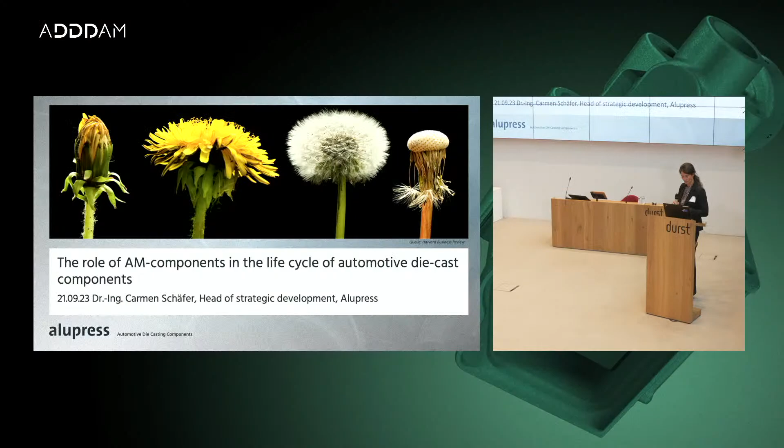Okay, thank you very much for the introduction, Matthias, and thank you for the possibility to present Alupress today. My name is Carmen Schäfer, I'm head of strategic development of the Alupress Group. Alupress is, as Harald said, an automotive die-cast manufacturer for the automotive industry. And I have the possibility today to show you how AM components can help us in the life cycle of automotive die-cast components. So short motivation, afterwards I show the automotive die-cast component cycle, then 2 examples, prototyping and tooling, and closing with a summary.

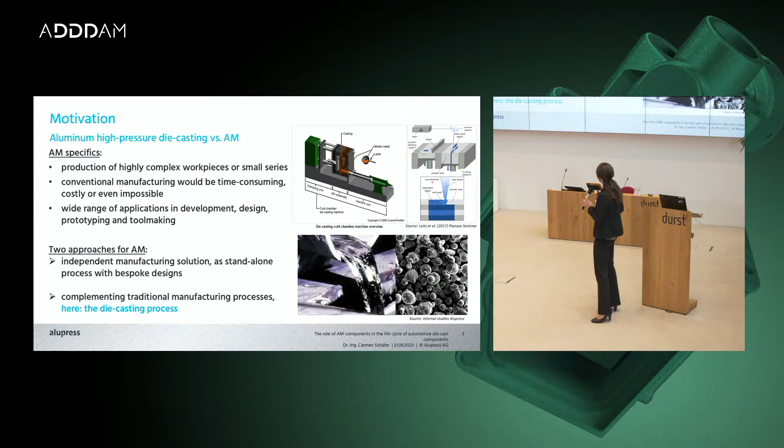On the right-hand side, you can see the huge difference. In case of die casting, we start from the melt. We have the cold chamber die casting process, and on the right-hand side, the prototyping, which starts with the same material in a different condition, from particles with selective laser melting. So we use the AM specifics. We can use high complex workpieces, design geometries, produce small series, and we can support also tooling. So in general, there are 2 approaches for AM. There is the independent standalone version of additive manufacturing with a dedicated design, or we use it as a complementing technology to traditional manufacturing processes, as in this case, for die casting.

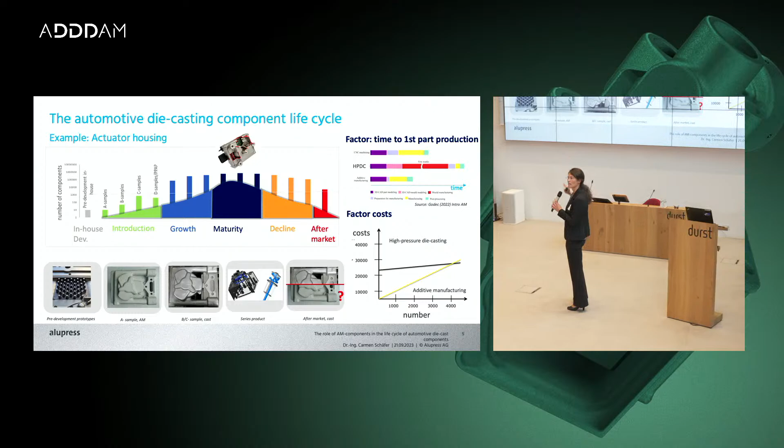On the top you see an actuator housing. This is the full component, and you see the die casting or additive manufactured part on the bottom. As soon as we enter this blue stage, growth and maturity of the component with hundreds of thousands of components, AM can support us, as Harald said, with tooling, to improve the tooling. And afterwards, there is a decline after a few years, and we have the topic of aftermarket.

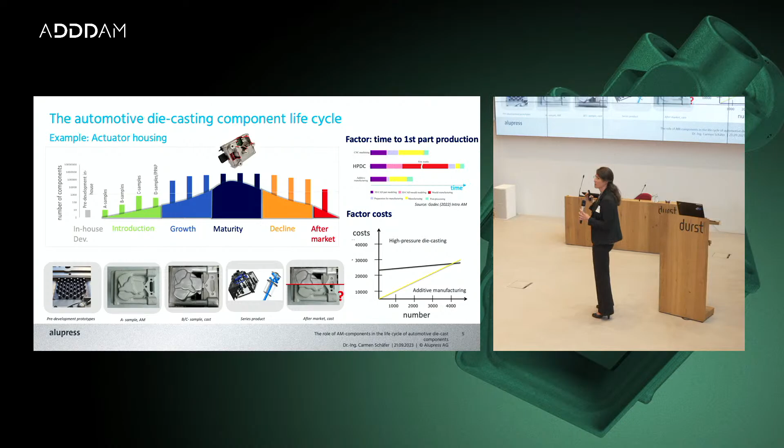And that is another possibility. You see the die casting and additive manufactured components with higher numbers, usually 500 to 5,000 pieces per year.

There are two factors that are important. First is the time to the first prototype. And you see there is high pressure die casting - this reddish area is these 12 weeks, a long time. We have the possibility to use CNC machining or even better additive manufacturing, so this is the shortest time we can get.

And since this tool that I mentioned at the beginning costs quite a lot of money, we have a very late break-even point in numbers. That means also at the early stage, we can use additive manufacturing as a cost-efficient solution for our parts.

I cannot build a tool, there is no budget for this at this stage, and I need it fast and lots of varieties. And then I can use additive manufacturing, and I can get my results.

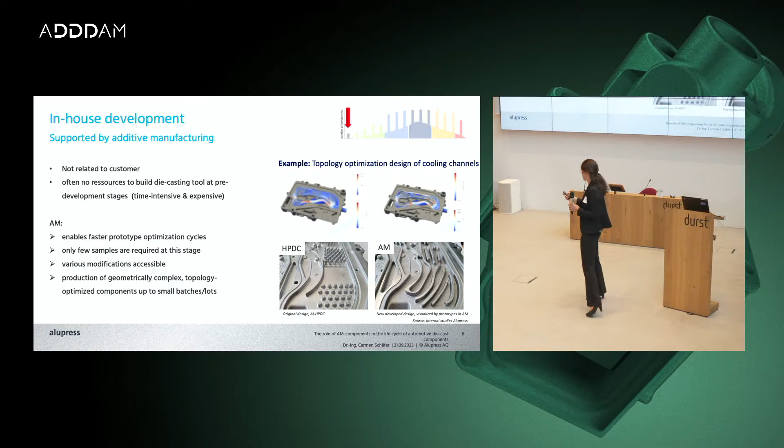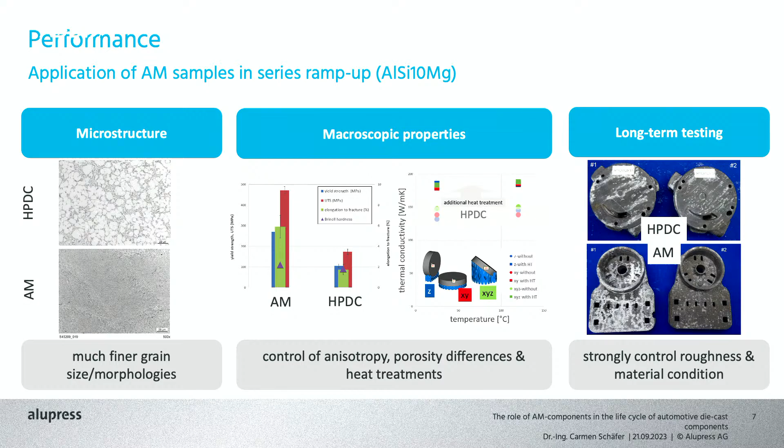Before I come to the next part, for series production, there is one issue to discuss about AM and die casting. You see it on the left side, it's the microstructure. High pressure die casting has a fast solidification rate, but AM is even a factor 100 faster - very fine microstructures, and they result in excellent properties.

You have the high pressure die cast, and you have on the left hand side the AM properties. They are anisotropic, you need to consider that. It's not a showstopper, but you need to keep it in mind.

And you can see it here on the right hand side, for example, for the thermal conductivity. Also this, if you need to preheat your building stage, or you want to change the thermal conductivity on purpose, you need to consider the building direction in AM. On the right-hand side, we have also the issue of roughness or material condition if you go in a long-term testing. This works fine, it agrees very well, and you need to consider this.

So if I come now to the main prototyping process, we want to go in die casting to the PPAP, to the production part approval process. And we have various stages of samples - A samples, B samples, C samples, D samples.

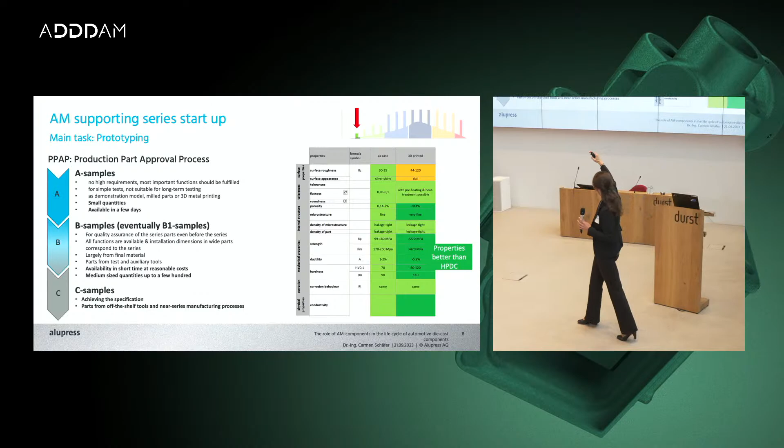And you see the blue coloring shows us that we can use A samples already in die casting, in additive manufacturing, and some of the B samples - small numbers, short time. And on the right-hand side, you see already the agreement as cast 3D printed. And you see mostly it looks pretty good. Some things you need to consider, and in some cases it looks even better. This has to be discussed with our customers.

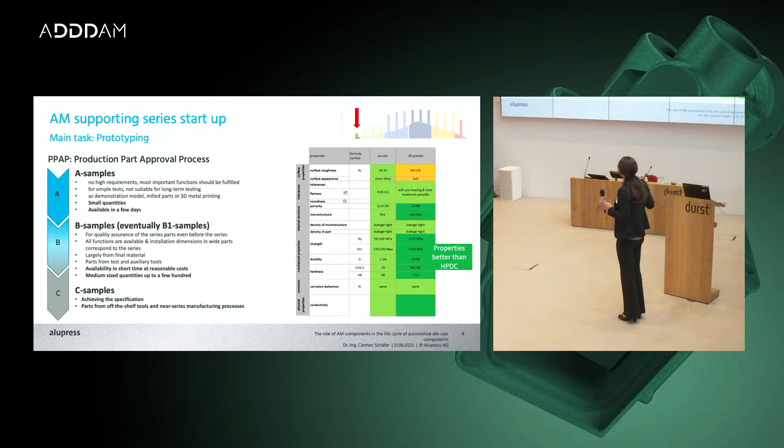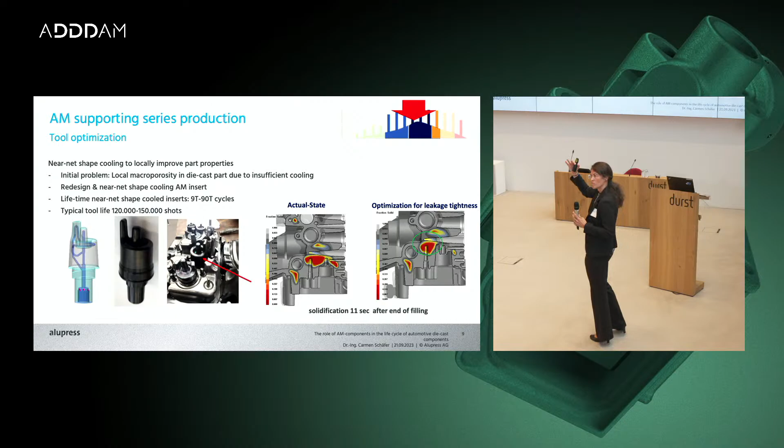When we go now to the maturity of the component, we have AM supporting our series production. The tool usually has lots of load in terms of thermal cycles - very high temperature, high load, so you can improve the tool locally by cooling, but also you can improve the tool for the properties. And this is a truck housing, an air dryer.

You see the seats for pneumatic ventiles on the bottom, where this red arrow points. And here in the simulation, we have this reddish area. That means I have a macroscopic shrinkage later - I have a hole in the material, which I don't want to have.

And you see here, where this greenish area is, we optimized actually this die with an insert with near net shape cooling, and we could reduce this area, improve the material. So this is also how we use AM since 2018, since several years in production.

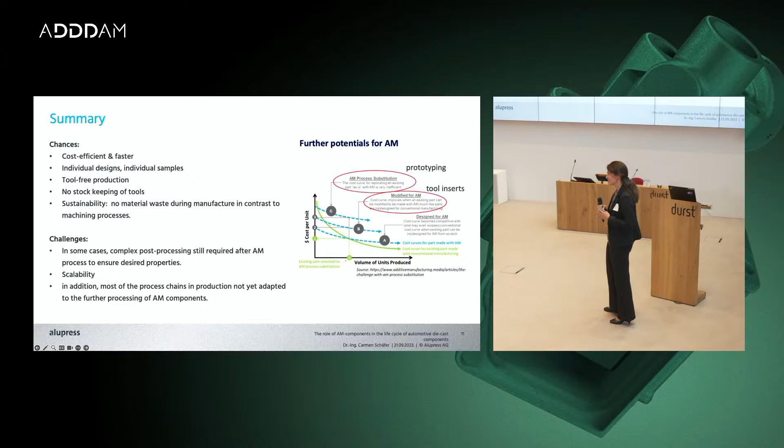So closing with this, the challenges are still, of course, in the scalability, and I think there will be several talks today going more into depth with this topic. Thank you very much, and I'm happy to answer your question in the Q&A section.

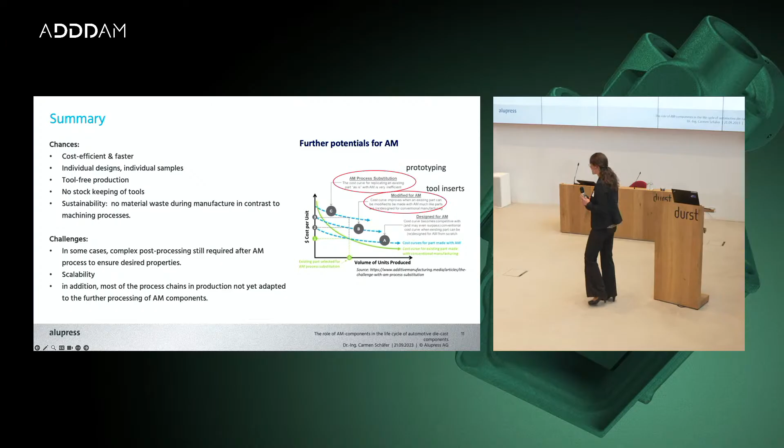Yeah, Carmen, thanks for the very nice presentation.

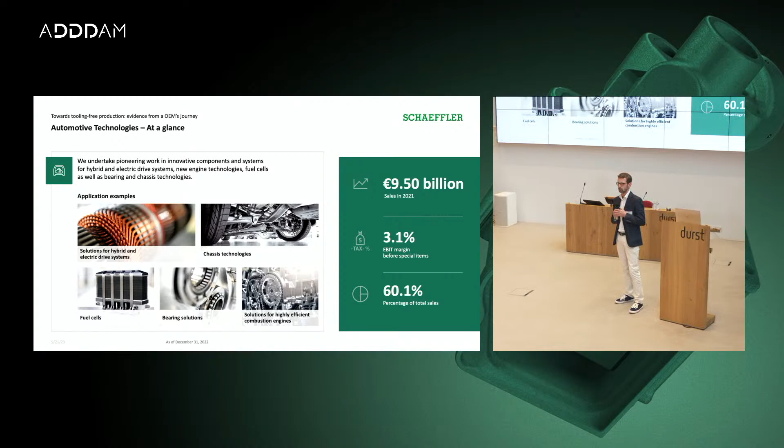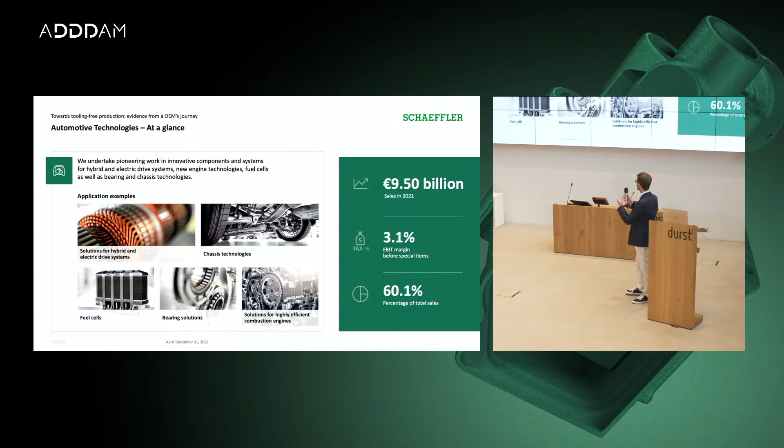What do we do within the automotive technologies division? Our goal is to provide our customers with groundbreaking solutions for highly efficient combustion engines, but we also offer e-motors, e-axles, and solutions that include the use of fuel cells. Within this complex organization, I work in the purchasing department, where we are responsible for managing nearly 1,900 suppliers, which deliver us 26,000 different parts, for a total purchasing volume of 4.5 billion euros annually. In other words, the perfect playground to explore the use of additive manufacturing.

Additive for us at Schaeffler is not something new. We established an internal additive manufacturing department in 2015. The department still exists, and my colleague Carsten Merklein is the head of the internal additive manufacturing department. As of today, nearly every Schaeffler plant uses additive manufacturing. We have internal printers to produce prototypes, tools, fixtures, or material that in general is used within serial production.

But to be honest with you, as of today, we do not actively purchase any part from our suppliers which is produced with additive manufacturing. And some months ago, we decided to start questioning ourselves, and we asked how we can include additive manufacturing in a sensible way within the product life cycle of our products.

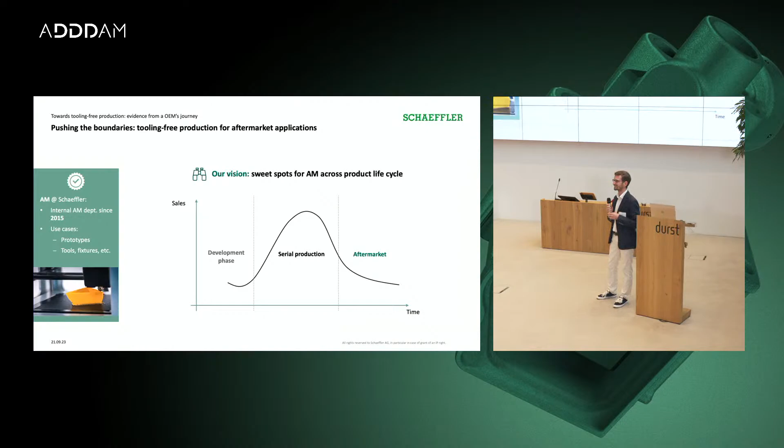Carmen already hinted at this before. For sure, we see potential in the development phase of our products. Additive manufacturing for quick prototyping is, however, no big news, as Matthias will say - it's an established use case. Where we see more potential is in the aftermarket phase, on the right side of the tail of our product life cycle curve. Why aftermarket? Because there, additive manufacturing could pave the way for what we call tooling-free manufacturing.

What are the characteristics that, in our view, make the aftermarket phase especially appealing for additive manufacturing? Two main characteristics. First, the low volumes - as automotive companies, after the serial production run, we need to still produce our products for the so-called aftermarket for a certain number of years.

In this instance, typically volumes are really low. It's really infrequent to see that we produce aftermarket parts with a volume which exceeds 1,000 pieces per year. In most cases, we need to produce just 100, 200 pieces per year.

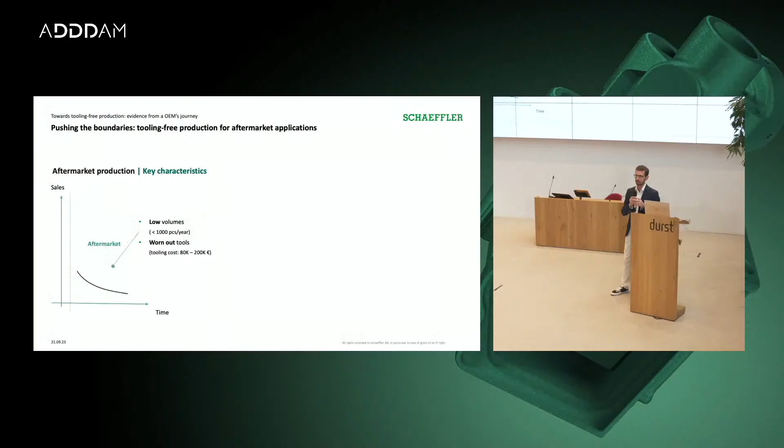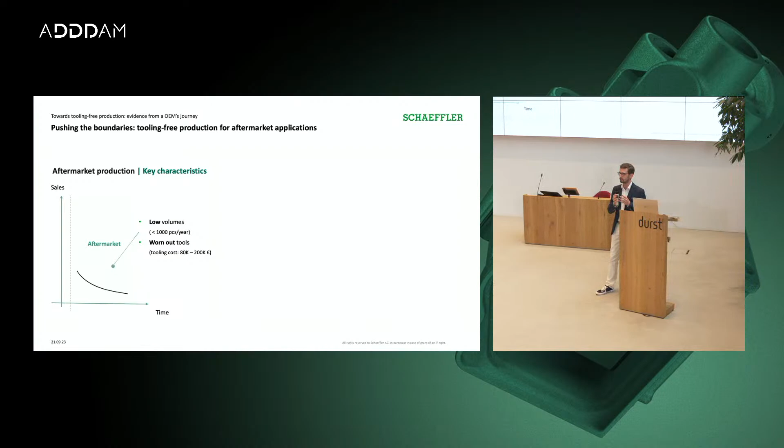Second point that makes aftermarket especially appealing for additive manufacturing concerns toolings in general, which are worn out after the serial production run. Replacing a tool is an expensive proposition, and sometimes it's really difficult for us to justify this sort of investment when we are looking at such low volumes. A technology like additive could really be a game changer, as it could enable tooling-free manufacturing.

To bring our vision closer to reality, we partnered up some months ago with ADDDAM. We decided to focus on one of our commodities, which are aluminum die-casted components, and we followed a two-step approach together with Matthias and his team.

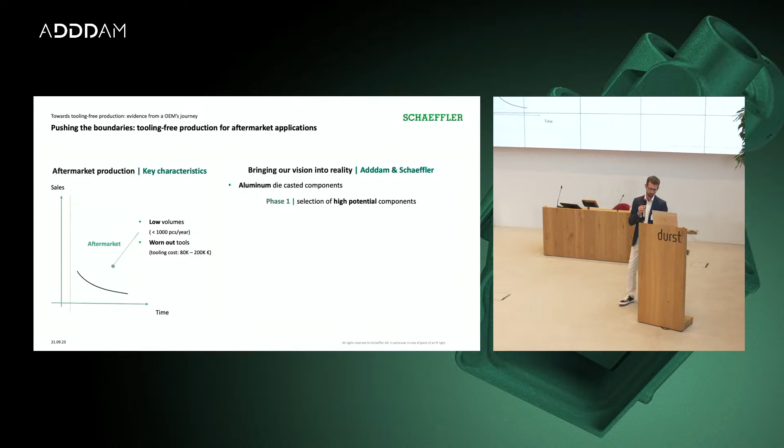In the first phase, we decided that the best option was to start narrowing the field and highlight and select components that have a high potential for production with additive manufacturing. We started with a list of 436 components, and here the ADDDAM team acted as our funnel. We narrowed down the field and came up with a list of just 8 part numbers that, in our view, are the most promising ones.

Why promising? Because volumes are typically very low, below 150 pieces per year, but we have also some part numbers for which the demand is just in the range of 40, 30, 50 pieces per year. So really not appealing for traditional die-casting manufacturing.

We also had a look at the geometries. Typically, geometries here are not especially complex, and they are also well finishable parts.

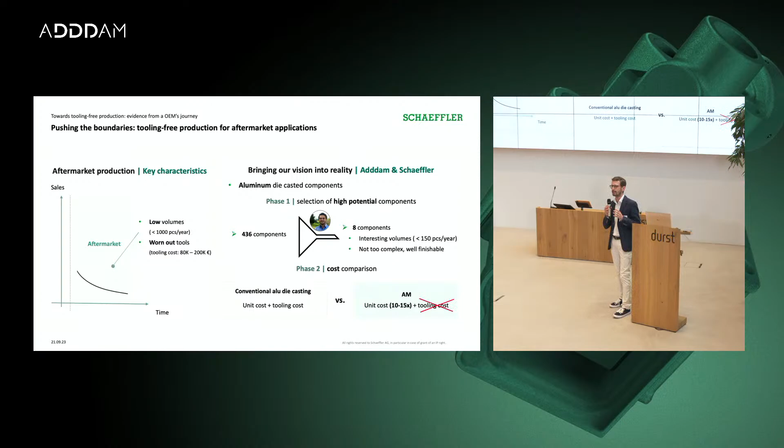As a second step, we are also looking at cost, but we are doing so looking at the so-called total cost. For traditional aluminum die-casting manufacturing, the total cost is the sum of the unit production cost plus the tooling cost. In the case of additive manufacturing, the tooling cost is not really there. We have to look at the unit cost, which, let's be honest, is way higher than the unit production cost for typical traditional aluminum die-casting.

One of the outcomes of our project is that the unit cost for additive is 10 to 15 times higher, but we do not have the tooling cost. So in the end, the cost comparison starts to make sense, and the numbers are really close to each other, with an added benefit for additive: the absence of stock. Because then you can produce the parts when you need them, and that's extremely appealing for us as a manufacturer.

So the cost comparison is ongoing. I'm expecting that in the next weeks we can complete it, and I'm positive that in the next months we at Schaeffler are going to have the first parts produced with additive manufacturing out of this project.

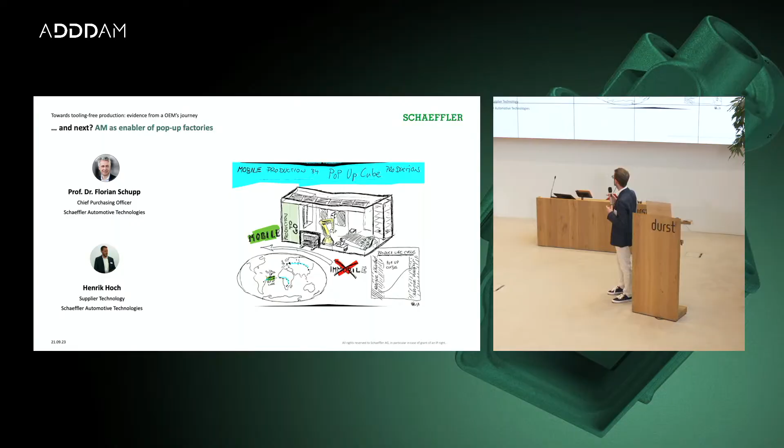But then what's next? Let me present this vision that we developed together with Florian Schupp, who is the CPO at Schaeffler, and Henrik Hoch. The combined use of flexible production technologies such as 3D printers, but also flexible automation, could pave the way for what we have named pop-up cubes, pop-up factories.

Our suppliers could package their production equipment within cubes, within containers, and then these containers could travel along the globe to be extremely close to our production facilities, with two main benefits: first, enhanced interaction between supplier and customer, and second, enhanced resilience of the supply chain. We all know how that is becoming more and more in focus given the latest developments.

That's our long-term vision, and I'm positive that thanks to ADDDAM and projects like the one we are conducting with ADDDAM, we will reach it in the next years.

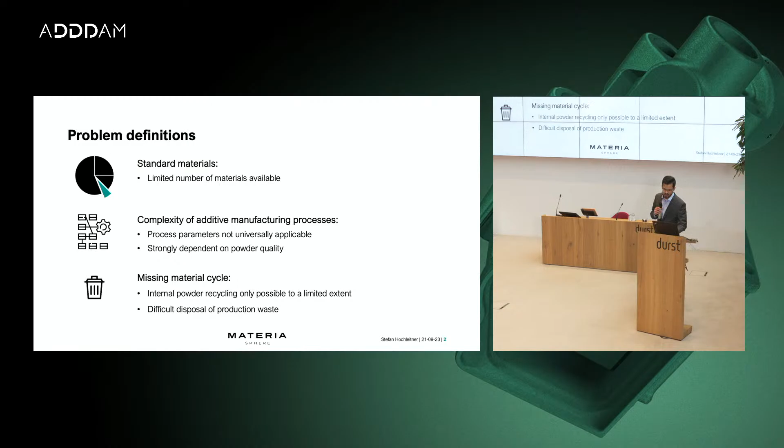Last but not least, the third topic for us was the missing material cycle. We found no good solution to dispose of production waste, and internal powder recycling is only possible to a limited extent right now. So we are working with three solutions right now.

First of all, we specialize in material engineering. We have the equipment and knowledge to produce individual materials to your specification and do iterative development using small powder quantities that we can produce in-house.

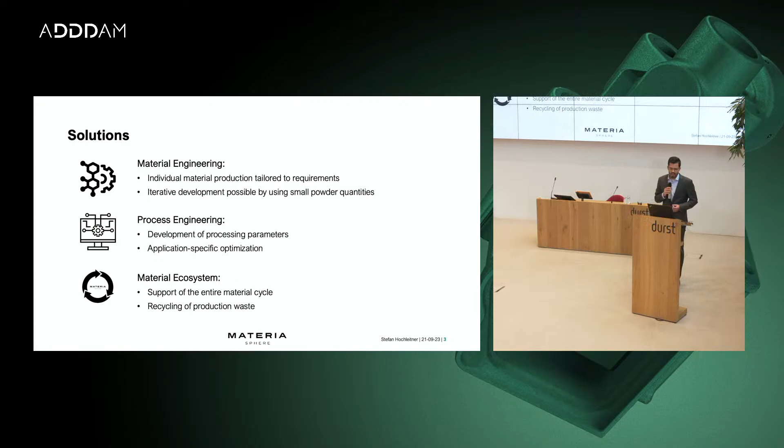Second, as I mentioned before, the process is also a big part of the part quality later on. So we also develop the processing parameters for our developed materials and can do application-specific optimization.

And last but not least, we're working right now on a material ecosystem where it's possible to support the entire material cycle for additive manufacturing and recycle as much waste as possible in the future.

So what's the first and biggest enabler for our work? It's the powder production itself. We focused on getting machines that can help us with individualized materials, and therefore we use a small batch production machine which uses an inert atomizing process.

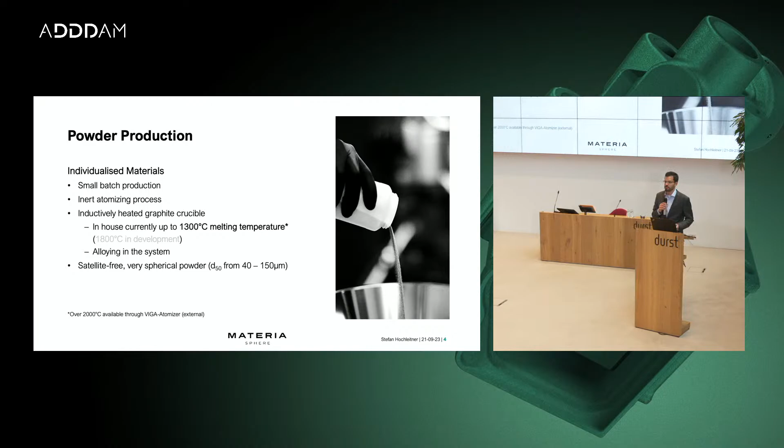We use an inductively heated graphite crucible, so it's possible for us to alloy directly in the system. The outcome of the machine is very spherical, satellite-free powder with a D50 particle size distribution from, let's say, 40 to 150 micrometers, depending on the customer's needs.

With the powder production sorted, we focused on material engineering. The materials for additive manufacturing are special in a way that you can tune them to your demands. You can tailor material properties to your needs. You have influence on strength, hardness, elasticity, and also thermal and electrical conductivity.

It's also possible to fine-tune process-specific powder properties, like the particle size distribution. You get some influence there with production. And it's also possible to account for the influence of volatile components during the process.

So if you use a zinc-rich alloy during your laser beam production phase, it's possible that some parts of zinc evaporate and your alloy is not in spec anymore after the process. We can account for this beforehand, and then after the process you get your alloy in spec.

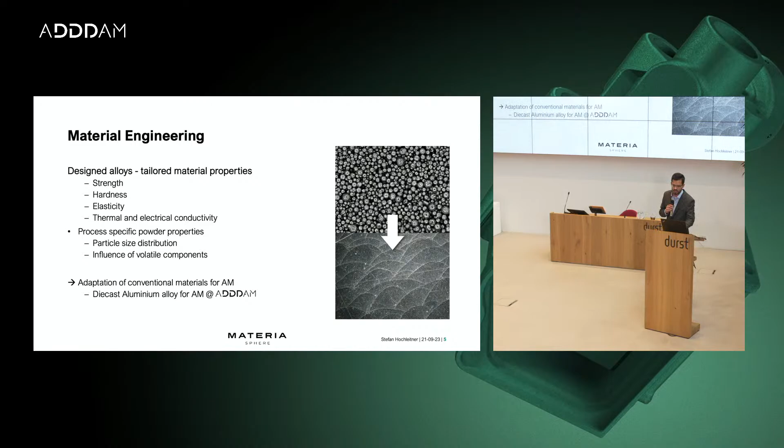With these methods, we were able to adapt a conventional material for AM here at ADDDAM. They are using, or will use, a die-cast aluminum for AM, and it was possible for us to enable them to do so.

Our material portfolio right now reaches from aluminum alloys, as I told before, to copper alloys as well, and in the future we want to get others into the company. Right now we have to rely on partners for these alloys, but it's also possible.

As I mentioned before, the process is as essential as the material itself, because you have a very strong influence on part quality with the processing parameters. Depending on laser speed, laser power, and hatch spacing, for example, you can influence the porosity, surface roughness, mechanical properties, and also the process productivity itself.

So it's possible in the future to build bespoke part features and build strategies depending on how your part should perform. You could print the bulk volume of the part with a completely different parameter focused on productiveness, and you can print high-strength points in the material with, let's say, a strength parameter, which is slower but enables greater strain resistance of the parts.

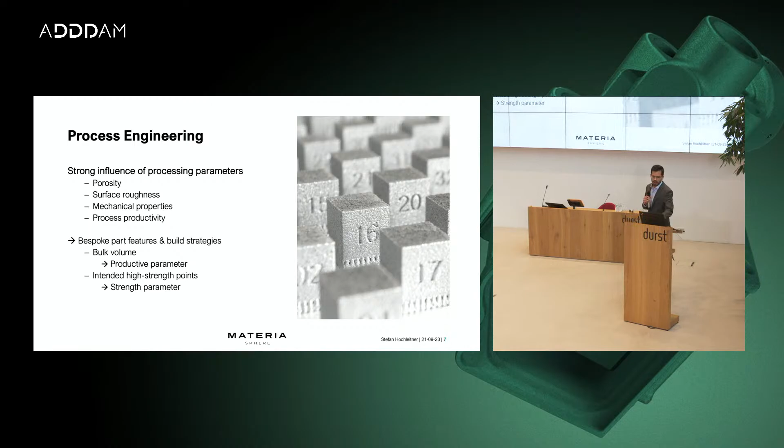Process, I mean printed - on one hand you get the part, on the other hand you get the production waste, and there is no good way to dispose of it. We want to establish a system where you can recycle the production waste and powder scrap. We get them back from you via a deposit system, analyze and treat it.

The whole cycle will use a mass balancing approach to keep track of the powder, certified via blockchain. Of course, there are challenges right now for such a system. First of all, it's the lack of standardization for materials in additive manufacturing, and carbon accounting is difficult right now because data is missing. To get this data, collaboration of all stakeholders along the chain is needed in the future.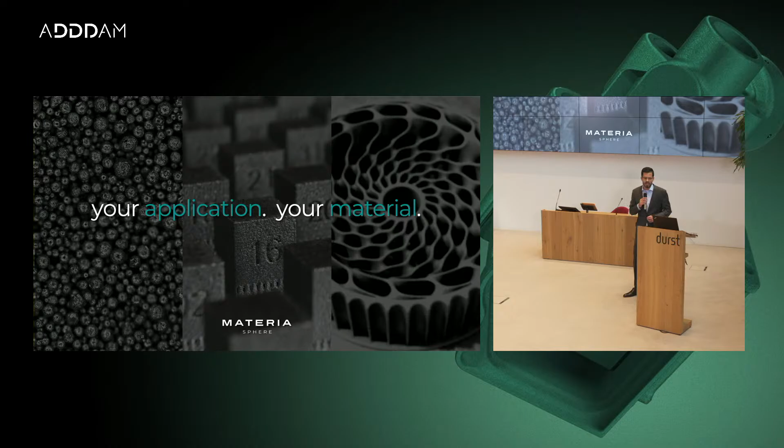But we see big benefits from there. First of all, naturally regulatory compliance is a big topic. But the main reason why we are doing it is because we want to reduce waste. We want to have a higher resource efficiency for additive manufacturing, and overall generate a smaller CO2 footprint by using more efficient secondary materials. So to sum it up, our big goal is to widen the possibilities of additive manufacturing via a wider material field. And we want to do it for your application and your material. Thank you.

Yeah Stefan, thanks for the insightful presentation. Just to leave this slide on - if you look at the middle, the little cubes, that's actually the result of our parameter study, originating from original die casting material, which you can see down on the left. There's also the atomized powder on the left, and the cubes after design of experiment. The final product is not yet there, but it looks very promising. It's also in our exhibition next door that we will enter after the presentations, so you can touch the results firsthand.

With that said, material is an extremely important piece in the whole additive manufacturing domain, enabling our applications at different customers. And material handling is also very important, so this is the point where I want to hand over to Martina, who will talk not only about automation in additive manufacturing, but also about some innovative ways to handle material during the process. So Martina, your stage - take your time.

Thanks again, Stefan.

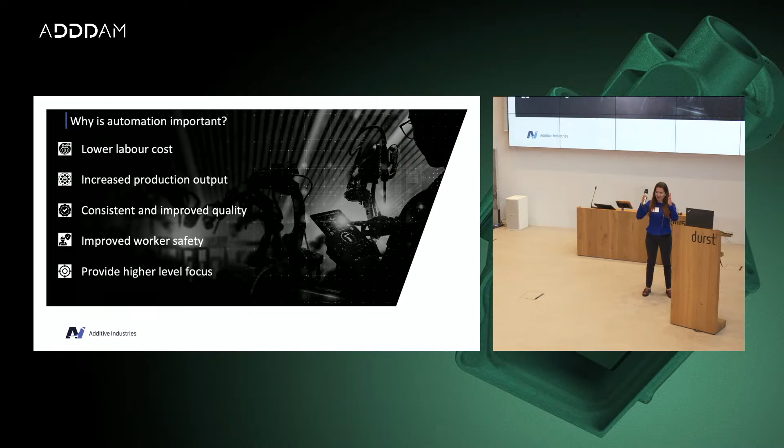By using automation, this exposure can be avoided, so that's another big benefit. And then the last one, maybe the less intuitive one, is that by reducing the time people need to work on the system and process, they'll have more free time to focus on other things, like improving other parts of the process, for example post-processing. Sometimes we focus so much on improving laser productivity that we forget the part is waiting for post-processing for days because there's a bottleneck there. So, more focus on the high-level process.

So, what are the main pain points of metal AM that have been identified today? This is very interesting. The AM Power report in 2023, this year, has reported a utilization rate of the current worldwide installed base of laser powder bed fusion systems as only 62%.

Now, there are two reasons for that. One is that there are a few companies which are very new in the market, and so the utilization rate is low because they're still finding the business case and application, which is normal in the scaling up process. But the other important point is the timing.

And with timing, I mean that anyone familiar with these technologies knows that when we start a job, we don't know when it's finished, or we know but cannot really control it. It might finish during the night, and maybe we don't have a shift during the night, the operator is not there. So if a job finishes during the night, the machine stays in standby until morning, and that time adds to a sum of times that lowers your utilization rate. Here automation will play a role.

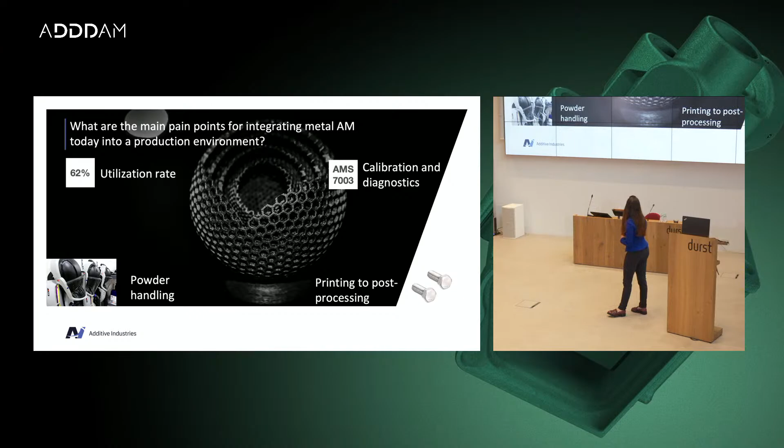Another pain point is calibration and diagnostics. This is very important for having a consistent process. We need to control the machine, the laser, the calibration. There are a couple of standard bodies like AMS or ASTM that are now finalizing and releasing more and more standards. The question is, how can we apply these standards in a consistent way? How can we be sure that this works?

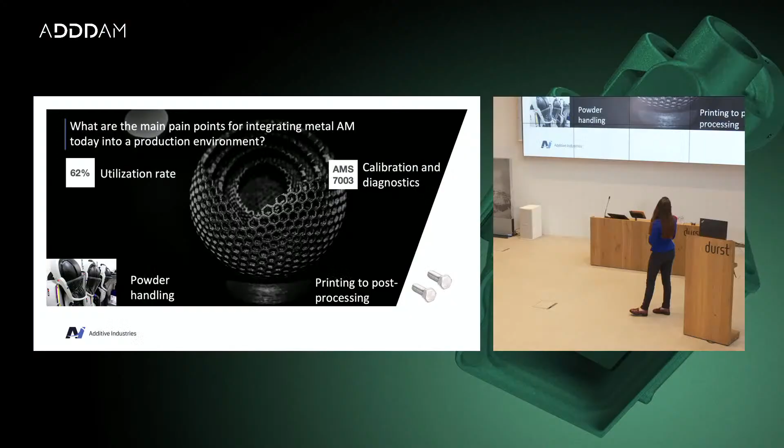And the last pain point we see is the link between the printing process and post-processing. The reason there are screws is because, if you're familiar with this process, you know it's not very easy, because you need an operator to unscrew the build plates from the machine, move it to the next step, and maybe screw it again. This is not really something that can be easily automated.

Now, in the next slide, I want to show you the possibilities that automation gives to laser powder bed fusion, and in particular, how we at Additive Industries have implemented that. So the first part is about the utilization rate, by adding robotics into the process, the automation.

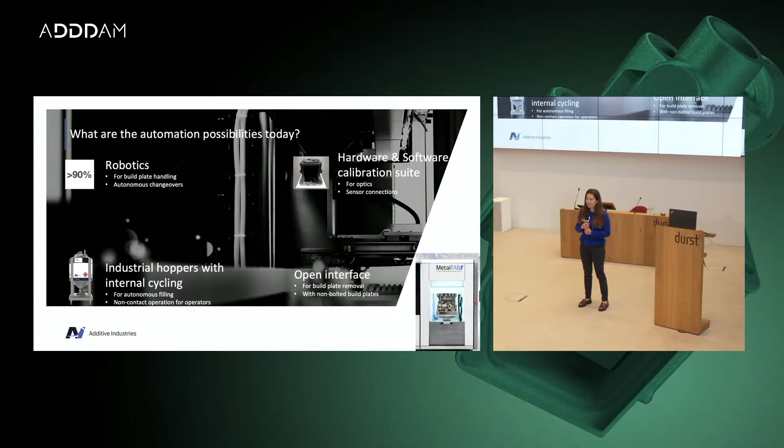For example, the build plate handling and the build plate leveling is done automatically, as well as having a robot in our machine that moves the build plates automatically from the process chamber up to the exchange chamber, and all these kinds of things. This way, we don't need to wait for the operator to be back in the office or on the production floor during the morning.

In one of our fully configured machines, we can run up to 8 jobs in series, even in different materials, without any manual operation. So you can just press play and the machine will do everything automatically.

The second point is the industrial hopper and the internal cycling, which answer the question about the powder. As I said before, the powder exposure of the operator is a big problem, and so for this, we try to avoid it.

We are avoiding it by adding this - it's called the PLT, the Powder Loading Tool. It's a tank which can be filled directly by the powder manufacturer, and goes directly into the machine. So we have two benefits here: one is there is no exposure of powder to the operator, and the second is that the loading of the powder can be done automatically while the printer is printing, so there is no downtime for loading the powder.

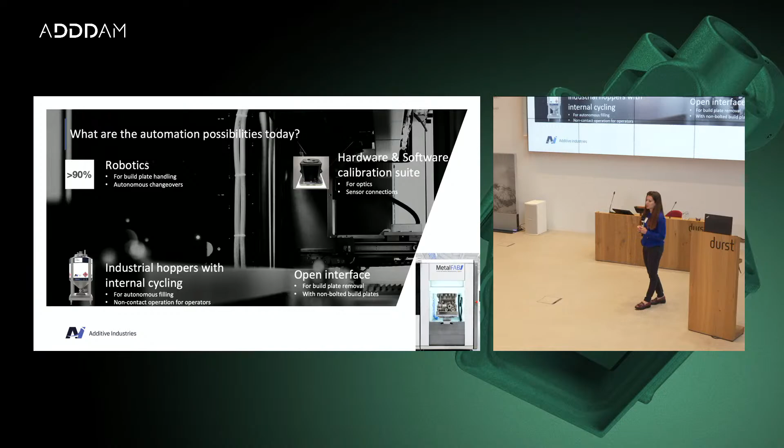Calibration, software and hardware. Here we have developed different hardware and software to calibrate the laser in an automated way. With this software, in the picture we see what we call the multi-beam tool. It's a tool which automatically calibrates all the lasers - the laser power, or also the laser beam shape and distribution - automatically just by pressing play.

So we don't have the problem with consistency that is common when the operator does this test. And also we don't have very long service time, because every customer can do it autonomously without even calling the OEM to do the calibration. And because everything is controlled by an algorithm, that's consistent.

Open interface - this is regarding the linking to post-processing. From the beginning, the MetalFAB has been designed with this exchange module and with unbolted build plates, so there are no screws, nothing, and this design is compatible with any production robot. So easily, when integrated into an autonomous or highly automated factory, a robot can just go there, take the build plate with the part, and move it to heat treatment, to wire EDM, and so on.

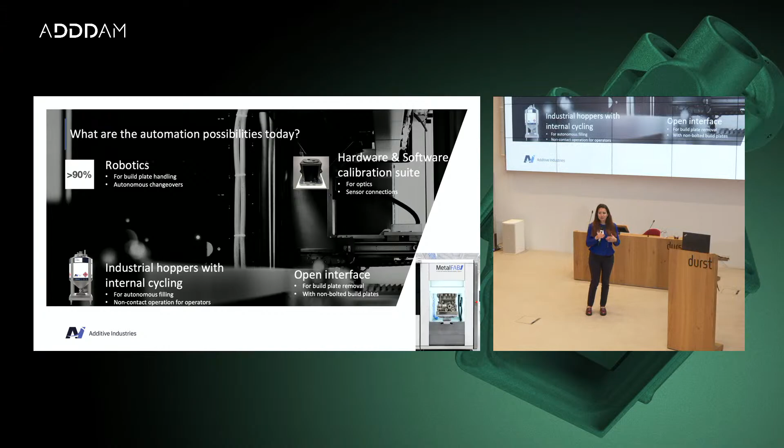So what are the values of automation? Increased capacity, as I said, because with the same number of machines you will have a higher throughput, since you don't have all the waiting time due to waiting for operators to be there. And I'd say overall equipment effectiveness, the highest OEE, because of the robustness of the process that has been improved with the automation.

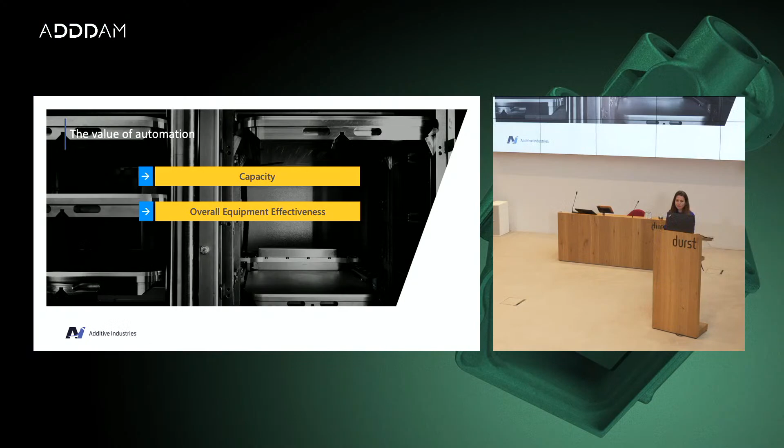As I said at the beginning, Alfa Romeo Formula One team is one of our partners, and I want to show you a few numbers regarding their production with Metal AM, and in particular with our Metal Fab. They now have four Metal Fabs on their production floor, with only half an FTE working on that with a single shift - an available capacity above 95%, and a utilization rate above 90%, which, compared with the world average of 62%, is much better.

Maybe these numbers are not very big for you in the automotive industry. In Formula One, they are already big. But with our machine, last year they produced between 27,000 to 37,000 parts in a year, with half an operator working on that. And with this, I've finished my presentation. Thank you, and I will be happy to answer your questions during the Q&A session.

Thank you very much, Martina, for providing the insight on how different pieces in additive now come together to create a more autonomous and automated system.

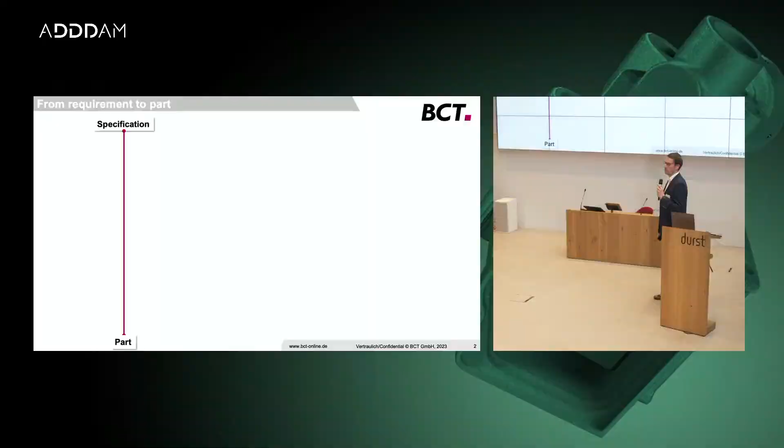So if you go high level enough, production is extremely simple. You have a specification and you want a part. And if you're the end customer, ideally, you really don't care how. So how we fill these lines is up to us all here. And realistically, there's multiple ways.

It's very important to remember that specification-driven manufacturing is the beginning of really becoming a good and sustainable production, because we've seen it in different cases also from the OEMs themselves. This is the way to understand that there's not just one way. Traditionally, I think we all know, you just mill it from a billet, because very simply, you just need one part. Who cares? You have a machine anyway. It's there. But there's many different ways to achieve this.

One thing to remember is AM used to be at a level of maturity that automation was never really an option. But we've seen now very impressive talks and insights how this is now an option. And the big question now remains: is this now a drop-in? Because currently it's dominated by use cases we've seen that have brilliant advantages due to process-specific advantages. However, the complexity is still there. A lot of this is now automated, but still, it's not really the drop-in replacement many people seem to claim.

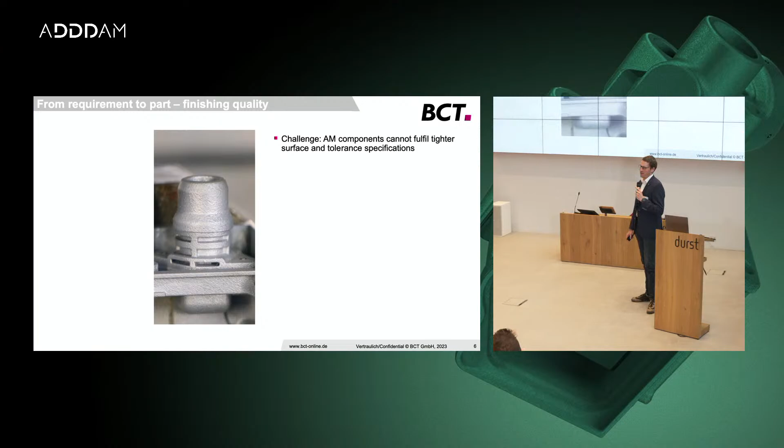Because, like Matthias said, there's a bit of a pain point right at the end when the part looks really nice, but let's put the finger into the wound a bit. This is supposed to fit a gasket, and thank you again for allowing us to show the real study here. That's not really going to work. So we all know the specs on the surface aren't there, not fully to the spec that we need for a technologically functional surface. We all also know here that subtractive will be necessary.

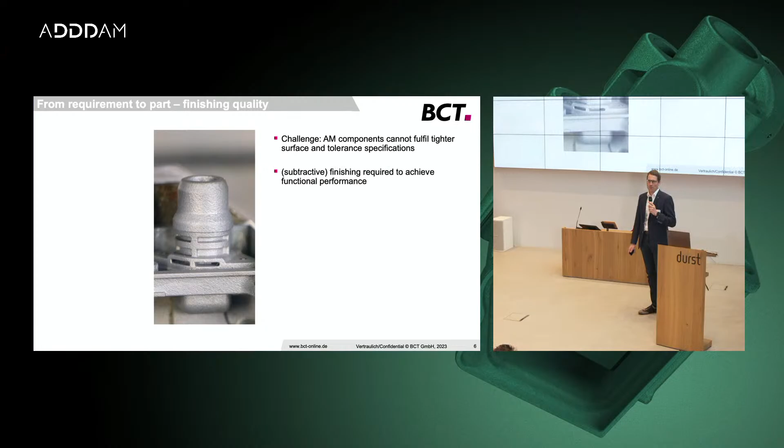And our job now is to bring the good old manufacturing method of subtractive into this new and great world. We have a lot of challenges, and I think most of us here are fully aware of them. It's residual stresses, it's shape deviations, the positioning is a problem, because if you don't have any clear references on any part, good luck clamping that to spec. So in reality, we need to do a lot of things.

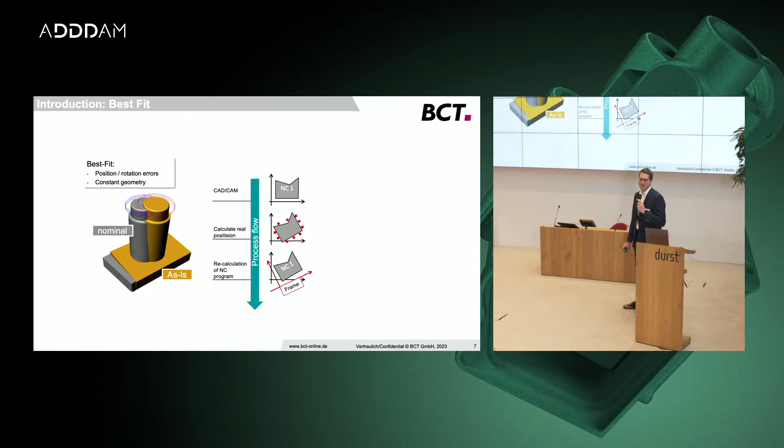I'll do a little excursion into the wording we always use. One is, what is the best fit? And I think that's pretty good to understand. In the end, it's finding your part in the part. Didn't Michelangelo say the statue is already there in the marble? We do the same, just in manufacturing. So we try to find for each and every part the right way to do this part.

And the way we do it is we don't move the part around. If there's people here who do post-machining conventionally in additive manufacturing, that's about the most horrible job I can imagine, putting new shims under every part every half an hour. And we see that a lot. That's still the reality there, but we try to do it the other way around. We'll just move the software and the digital side towards your part. We'll make it work. And there's actually a second level to this.

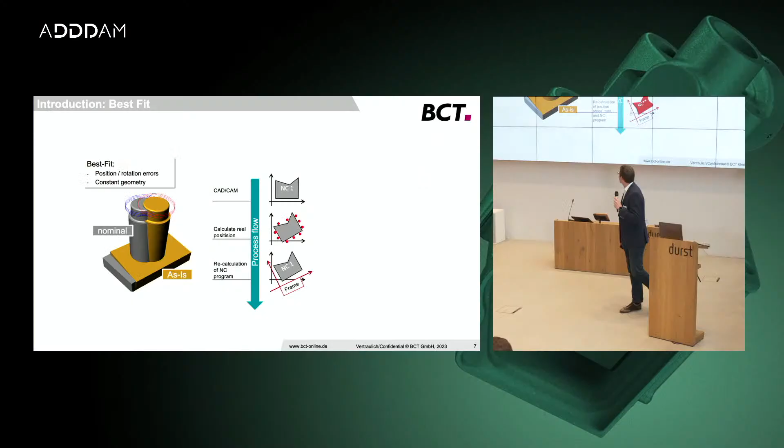This is what we call adaptive machining. Now we found the position, and at this point it makes sense to introduce what BCT does as a main business. We come from high-end automation and aerospace component overhaul. Meaning, there's another way to really ruin your fitting and your surface: it's flying the part for 12,000 hours. The stuff we see going in doesn't look like the spec at all. And it's a necessary way to adapt to every individual part, because a part looks very different if it's flown through sand for 12 years or if it's flown in clear, crisp Nordic air, right?

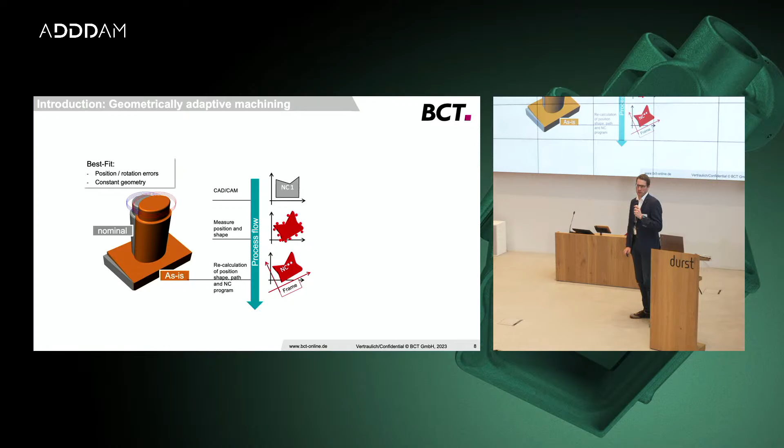So this is where we come from, and this is why we have this toolkit available to do what I'm going to show you, that we can even warp the program itself onto each part. The study you'll see is actually just rigid body, but this goes a bit too deep for 10 minutes. So let's find a part, and let's find it with what we call machine integrated measuring and adaptive machining. And what I will show you now, in a quick video in a minute, is we'll do things that are currently simply impossible in the conventional chains.

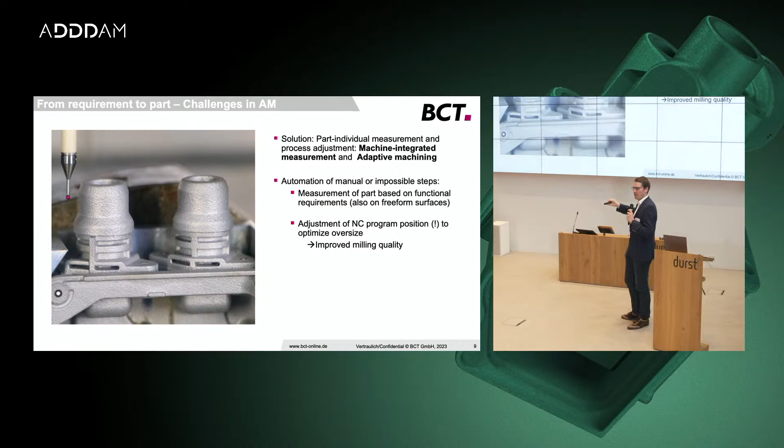We need to find a part that has no reference, that has only freeform surfaces sometimes, so there's no clear coordinate system available. We'll do it by spanning individual specification-based coordinate systems, meaning this flange doesn't really care, because if there's a flexible tube to it, where the rest of the part is, this just needs to be right for the gasket and the fitting itself. So you can go really deep and complex in building these sorts of logics.

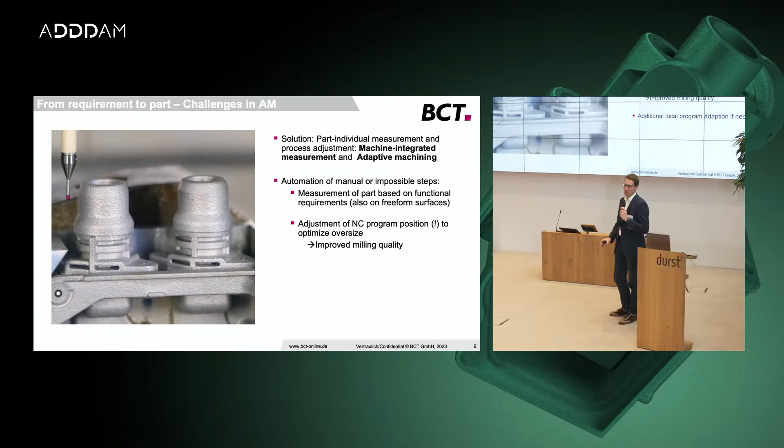And again, if necessary, especially in areas of support, we can basically drape the program onto the part to get this smooth and transition-free transfer between machined and unmachined, because the mechanical and corrosion implications of having a hard edge in the part can sometimes be very critical.

And all of this, of course, in the spirit of today, is fully automated. And the beautiful thing again is we make the machine a measuring machine. So just to throw in a little gadget again, we can do quality assurance afterwards. So we will check every part afterwards as well.

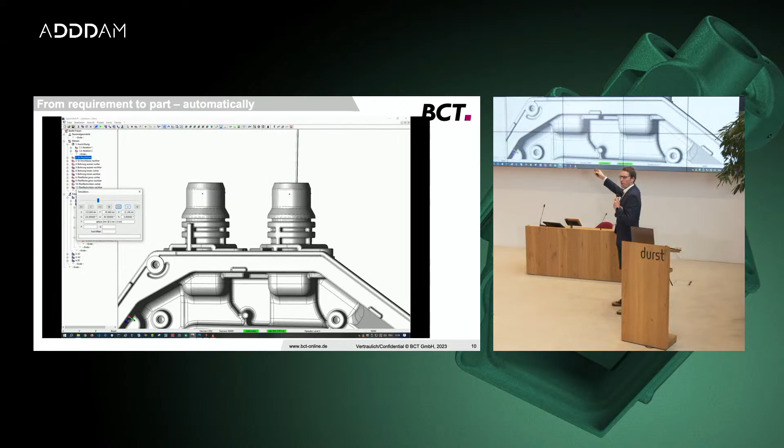So enough of theory, let's look at it. That's our software running. You see on the left we build a process tree in the end that will be run. So we send the machine on its way.

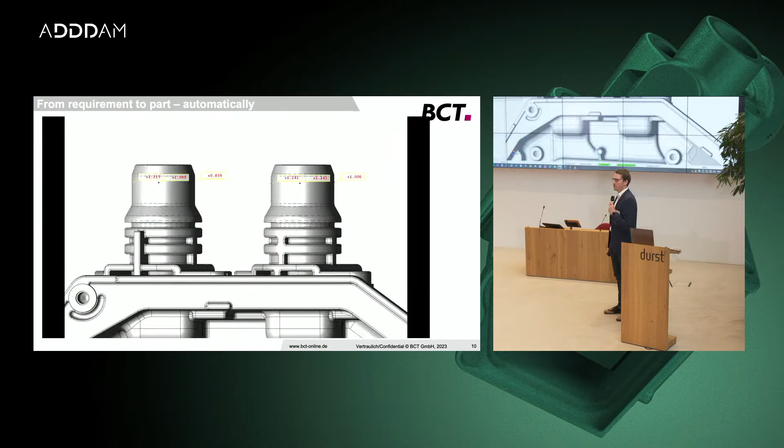Let's find the part. And we'll find the part, we'll do the math, and we'll find that this part has the most homogeneous oversize as shown. And then we just simply move the program onto this very part and do it.

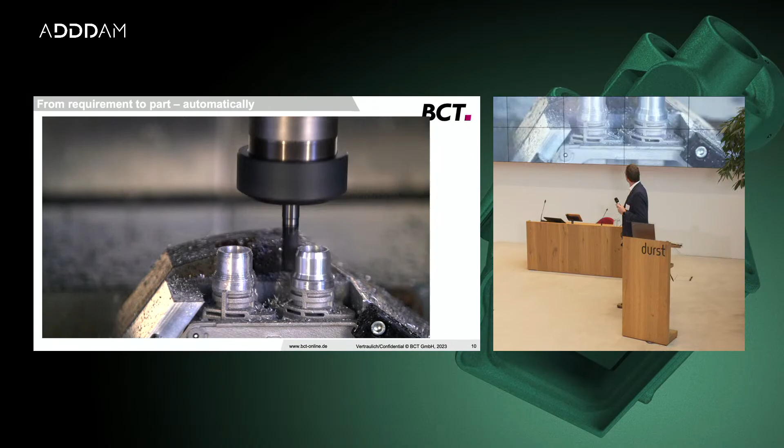I'll leave you to a very meditative 30 seconds of finish milling of this part to enjoy. In case you didn't notice, this is sped up.

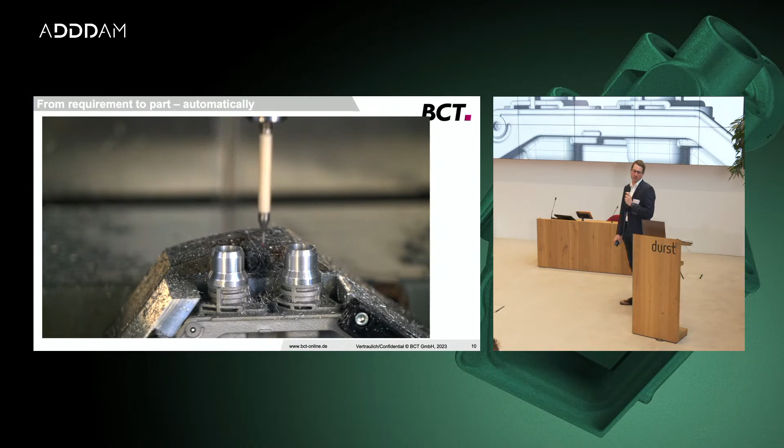So, quality assurance, and we get a green from the software. We got a very regular oversize, so we're happy with this. And you can actually see this physical part in the show later on. I've brought it with me, so we can also happily discuss the ins and outs of this problem later on.

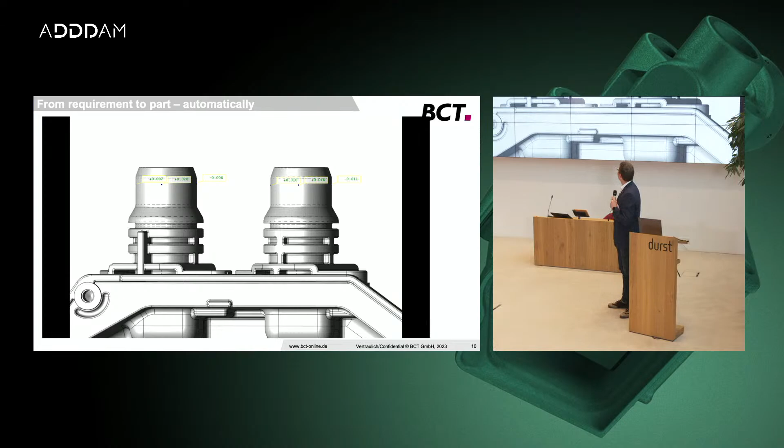Rightfully said, you don't really want to be around powder all day, right? So that's one way of doing it. But we also do it by bringing intelligence to the shop floor level. This software isn't running in the office. This software is running the machine. So it's next to the operator. It gives feedback to the operator and it allows intervention of the operator if needed or wanted. But that also makes the job more interesting.

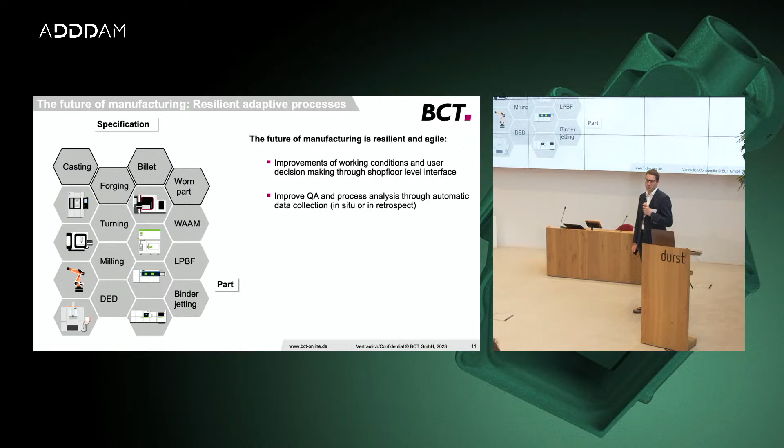We improve the quality assurance of the whole thing by really collecting a lot more data. This software can add on features like monitoring milling forces, integrating laser line scanners. So we can do a whole lot more in data if you're willing to mine the data mine, realistically. And the flexibility in this is you can basically throw in whatever you want. And as long as there is a mathematical solution in the range that the software is permitted to do, you will get the same result. And that has really big implications in production.

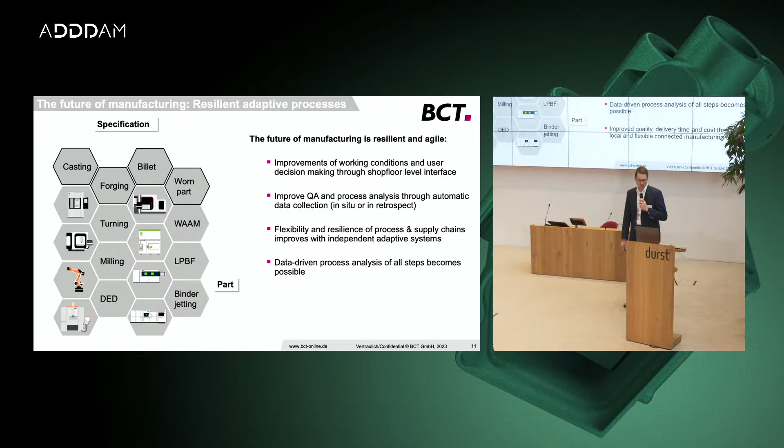And again, the data-driven analysis becomes possible when you scale and you left the machine for 8 build jobs for a week, right? You might also be interested after leaving the milling machine alone for 2 days, what has happened. And you will have data on that. And really, you will see improvements all throughout.

So in the end, ideally, when you get the next specification, it's not that you don't care, but you have the choice of throwing in maybe a casting, and then you do some adaptive laser cladding onto it to do hard facing locally, and then you finish it and you're done. Or you really feel like running your powder bed machine today, and you mill that adaptively, and you're done.

Or, and here comes the sustainable part, again, that is our core business, maybe you have an old part, which you then prepare by milling, weld on something to fix it, and then you're done. So this freedom of choice is what we try to give with what we call adaptive processes, and I'm really looking forward to seeing this kind of operation here. Thank you very much.

Thank you, Jan. I fear that closes all the enabler sessions, and now I have to deliver. But yeah, as promised, I come last to wrap it all up and tell you deeper what we are building here with all the inputs we get from our customers, potential customers, and from the hardware and software evolving on the market. Our goal is to achieve unparalleled productivity in AM through strict focus and integration. That sums it all up.

For those who might have joined a bit later, I'm Matthias Wiese, CEO of ADDDAM. I had a long story in the automotive domain before joining the little team here, and now we are pushing the limits of aluminum additive manufacturing.

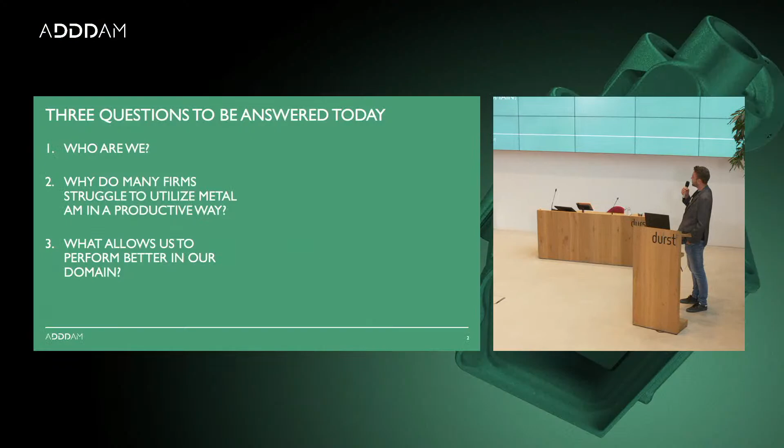I just want to build an agenda to answer 3 questions to you. The most important, that's the label of the event today, Meet ADDDAM - who are we? But also, why do many firms in our domain struggle to use AM in a productive way, and what allows us in particular to perform better in this domain. So let's jump right in.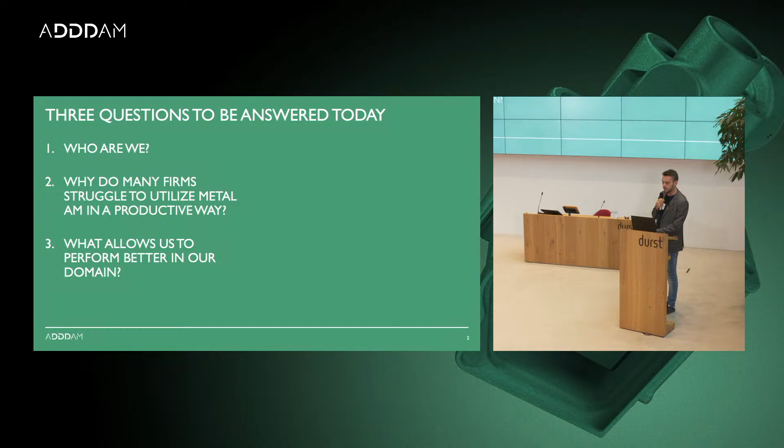I think in the very beginning Harald already addressed this topic, but I'll keep it short for those who might join later online. We are ADDDAM. We were established in 2020 out of a startup incubator here in the Technikon Group. We are now a team of 6 experts, and growing - experts that came from all the neighboring sister companies to work on this mission of becoming a flexible volume manufacturer of additively manufactured aluminum components, for the domains of machine engineering and automotive.

Just very quickly, the 2 big sisters we are heavily learning from: Durst, which Harald already addressed - 800 employees, quarter billion in revenue, specialized in digital printing all around the globe. And also spun out of Durst earlier, Alupress, which is now a tier supplier for highly complex casting components in the automotive domain.

What is really interesting about all these different companies is what they are bringing together. On the left side we see components situated in the Durst printer - very intricate, complex structures milled from billet with internal routings of fluids. On the right side, very complex castings, pure mass manufacturing, millions, not hundreds. We see that both these domains benefit a lot from additive manufacturing.

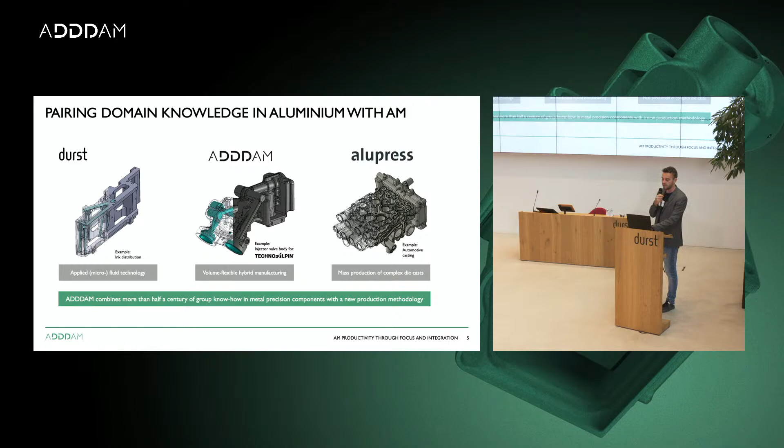To take an example published before, our customer TechnoAlpin has realized injector valve bodies for their new snow cannons. They're also here on site today, you can speak to them, and the part will be on display in the exhibition later. So we are combining more than half a century of know-how in metal precision components here in our little company right now, with a new production method called AM.

But let's dive a little bit deeper into why so many firms struggle to use AM productively.

That basically starts with understanding the customer needs and wants, right? We heard from Schaeffler, from Alupress, also from TechnoAlpin. There might be a case for fast functional prototypes to test a product and go to market. There might be a need for small series because it's a low runner, or we need to supply parts in the aftermarket - using the technology as a supply chain backup for flexible factories distributed around the world. And the last domain is the AM-only design parts, which can only be realized by this particular technology, but that's really slowly evolving in the industry, so it's not the main case.

If you look at all of these, obviously AM comes to customers to use the technology's intrinsic flexibility - to leverage the short lead times the process promises, while still maintaining the usual quality level.

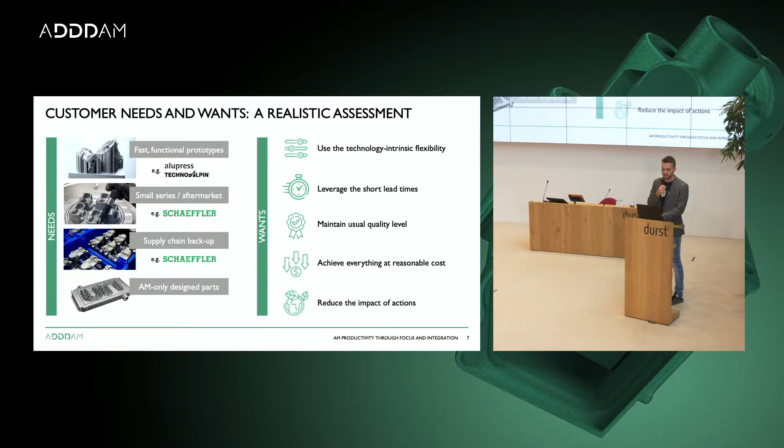That's so far so nice. Then two factors come into play which are a bit more stressful for producing companies like us: cost and impact. Obviously we want to achieve everything at reasonable cost. AM per se, as we heard from Francesco already, is a lot more costly than mass manufacturing technologies. But we also see a very good potential to reduce the environmental impact of companies' actions, because we are more material efficient when it comes to the final part. So all of these are nice goals, but they're often not universally achievable together.

We also addressed it a bit through the different presentations. AM doesn't come as a single process. We have a complete process chain from printing to quality, over depowdering, material treatments like heat treatment, removing the supports, and machining, as we heard in the last presentation. So there's a lot of flows of information, material wastes, and obviously also products along the process chain.

That comes with a lot of challenges, right? So as a producer or a production company, we want to achieve high uptimes for our equipment. We want to maintain a low lead time for the customer, so he or she gets their products fast and on time. We need to coordinate all the processes in the process chain to achieve these, and also assure at least the base level of quality the customer expects.

But we also not only have challenges, we have real problems. The real problem here is with AM there's a high amount of manual data preparation involved. There's a labor-intense process, labor-intense interfaces. Martina already addressed that. You have to transfer materials, you have to transfer build plates between machines, between processing steps, and also we addressed this. Martina, I think you also already said that the quality of the product is extremely coupled to the operator. So if a person drops out of your company the next week, it's not guaranteed that you can manufacture the product at the same quality level, especially in AM.

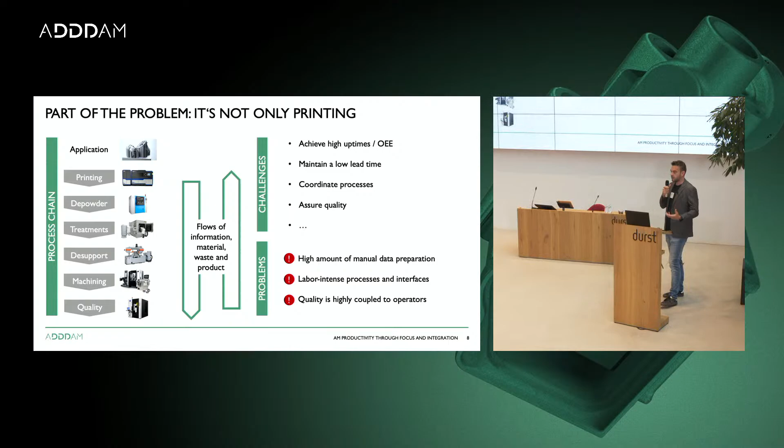So what we see in the market right now is this typical application-centric approach, right? AM is basically fired at everything that looks like it's printable. That means we are opening up not only on the aluminum process chain, we are also using, for example, copper. We could use basically steel, we could use titanium, to pick all these low-hanging fruits and get all these applications into the business.

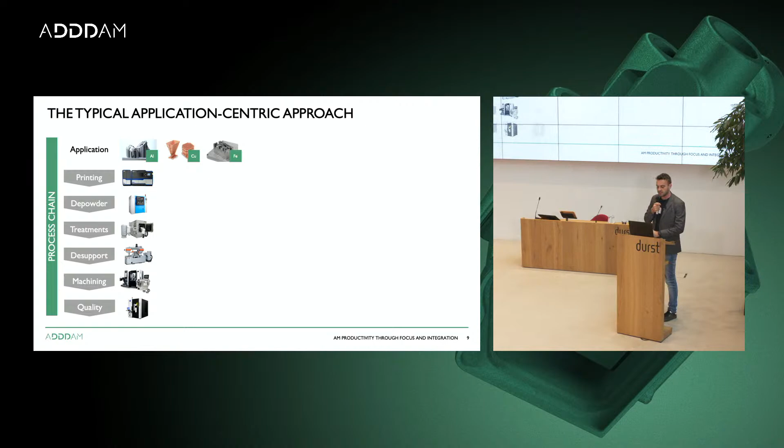What happens with the underlying manufacturing system is it inflates. The printers are coupled to the material usually, so you cannot change between materials without high efforts, and this means dropping OEEs. Also, everything that comes in contact with powder has the risk of contamination, so depowdering needs dedicated machines.

Treatments, more or less desupporting - if you desupport aluminum, you can saw it from the build plate. If you desupport very hard steel alloy, you might need to wire erode it from the build platform, so you need another machine. And obviously also in the machining step, it inflates the amount of tools that are needed.

So we see the inflation of the manufacturing system. We see problems in load shifting and maintaining a high OEE. We see that the automation potential with this inflating manufacturing system is limited because I have so many interfaces. And as a producer, I more accumulate general knowledge for all the processes and all the domains rather than specialized knowledge across one particular process chain in one material domain.

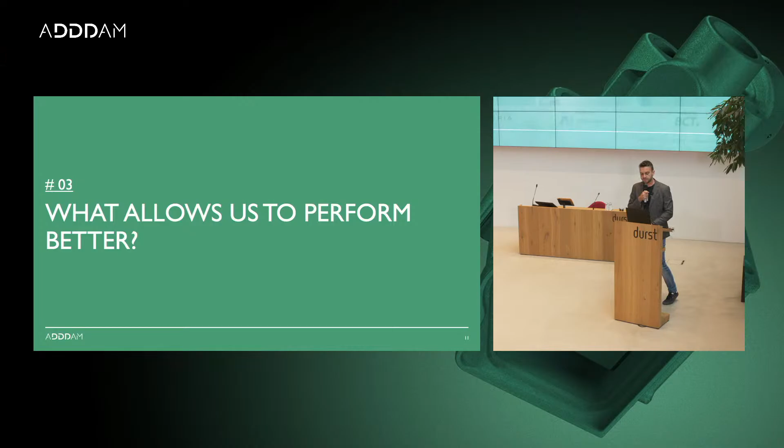So, wrapping it up, this is why we focus on aluminium. We heard from three enablers today, and I want to pick it up one by one. With Materia, we are looking down this pipeline of tailored aluminum alloys, to enable our customers with different alloys that are more tailored to their application needs, and not only the standard aluminium you see in the market, AlSi10Mg. We want to enhance the material recycling and circularity, and this is enabled by staying contamination free, staying with one material domain that you can actually, in the worst case, recycle it all together, and then go to basically reproduce material from there. And by just focusing on aluminum, we also get the deeper understanding of the parameter and material interaction, parameter material machine interaction, if we would be very clear here.

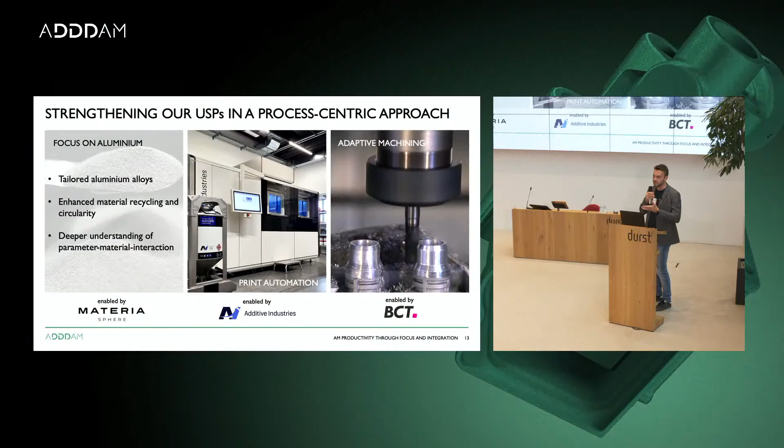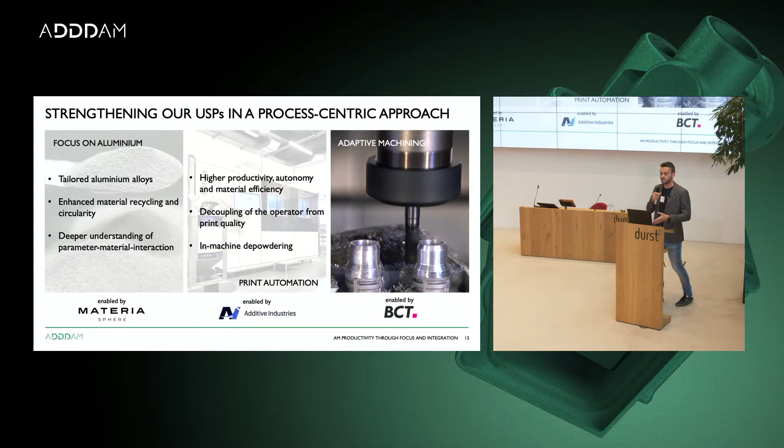The next stage is print automation. Milling has been there for quite a while now - it's highly automated, but we just see this development happening in the printing domain, and that is where we take the inputs that are delivered by Additive Industries for having a higher productivity, autonomy, and material efficiency here. And also the very mission critical factor to decouple the operator from the overall quality of the print and the final product. And also we have the opportunity to integrate here, because the machine offers in-machine depowdering, so I'm getting rid of another process in the process chain and make a more lean process chain.

And last but not least, as presented by Jan, adaptive machining.

All the challenges that were very AM-specific right now can be mitigated by software solutions. We see that we have a higher throughput, less labor. We don't need to orient the part for hours in the machine to make sure every surface is touched. It's automated, and we can integrate the final quality assessment in-machine, so when the part comes out, we're sure it fits and fulfills the wishes of our customer.

So, getting back to the whole Technikon ecosystem, what we present here is an extended value proposition in the product lifecycle. In the very beginning, you might remember CARMEN showing the aluminum die casting product lifecycle. We're not just focusing on die casting, but it's a big domain where we see a lot of applications happening with inputs gathered from software and hardware.

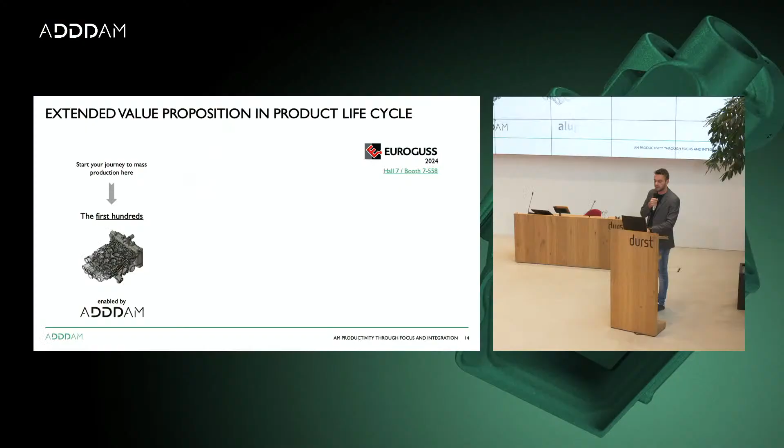If you want to go to mass production, you can start your journey with ADDDAM for the first 100 parts. If you want the following millions, you head into a die casting process, and back again for the last 1,000 in aftermarket. But to understand this, you need to enable the AM process at the very birth of the product. It's very hard to do that after the product has been released, trying to specify all requirements and get an AM aftermarket product when it's already in series with a mass manufacturing technology not in parallel enabled for AM.

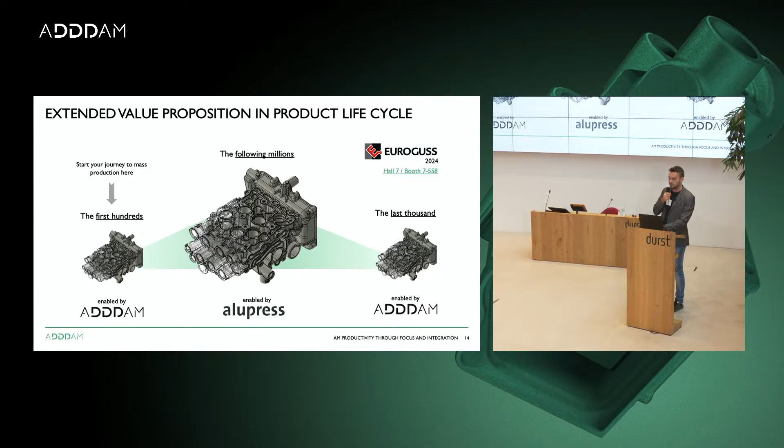We will also be at Euroguss next January, displaying that with Alupress. So people here and people in the stream, feel free to visit us. We have a couple of use cases to tell to close this aluminum product lifecycle.

So maybe this answered one or two of the questions already. So who are we? We are ADDDAM. We are your specialist for aluminum AM.

And why do many firms in our domain struggle to utilize that in a productive way? As I said, there's usually not enough focus and sparse integration happening—it's more evolving from the lab. What allows us to perform better is that we really focus on one material domain, and we strive for high integration of processes, keeping the process chain short and narrow right from the start.

So to wrap it all up, the mission doesn't only start by printing at our facility. We heard it from Francesco—many OEMs, many tier ones have printers on site. They realize first prototypes, but when it gets into B samples, going into hundreds, it's often just not cost efficient to print in-house. So you might shift all that to a specialized production company, for example us, who is able to manufacture a couple of hundreds of these parts.

We see there might also be a need to educate operators how to look into more automated, more streamlined AM. So we are launching the ADDDAM Academy to train operators, certified by the DVS, in Q1 2024. We are able to educate along the complete process chain of aluminum.